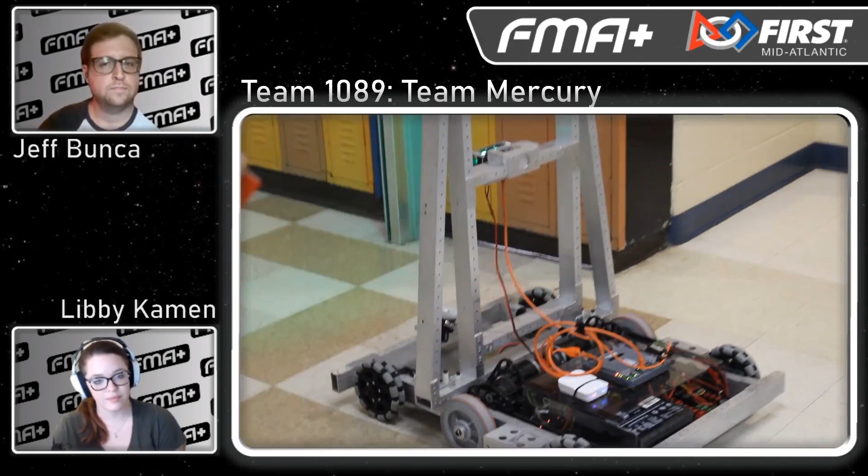One of our goals on the Programming Electronics Committee is to keep it sustainable, keep new members coming in and building up their skill sets. Over the past 3 to 4 years we've been building upon our code base and optimizing existing code so it's robust and strong. We have a command-based system using WPI library, which makes it easier to break into project groups and delegate roles to project managers, who then have their own groups. The project managers work with students one-on-one or in small groups to complete tasks and learn more, whether it's vision processing, color processing, which we saw more with the control panel this year, motion profiling, autons, and things like that. With electronics, we teach them how to wire the robot in an organized fashion, how to solder and crimp, and all the physical hardware components needed on the robot. All of these processes make it much easier to train new members and get them integrated into our committee and working.

It's one thing to have a strong programming presence and a strong programming team, but you guys have actually designed a process and a system to maintain that level of programming efficiency for years to come. That's super smart and really commendable.

But Nihar, we've talked about the programming, we've talked about how your team is set up and what you guys do to prepare. But now I want to know what you guys have made. So Nihar, why don't you run us through the robot?

Yeah, absolutely. So this year we named our robot Knock on Wood. We used a West Coast drive, 8 wheels, so 6-inch Colsons all around with a double drop center. We used WCP single speed gearboxes with 4 Falcon 500s, 2 on each side, which gives us a rough speed around 15 feet per second.

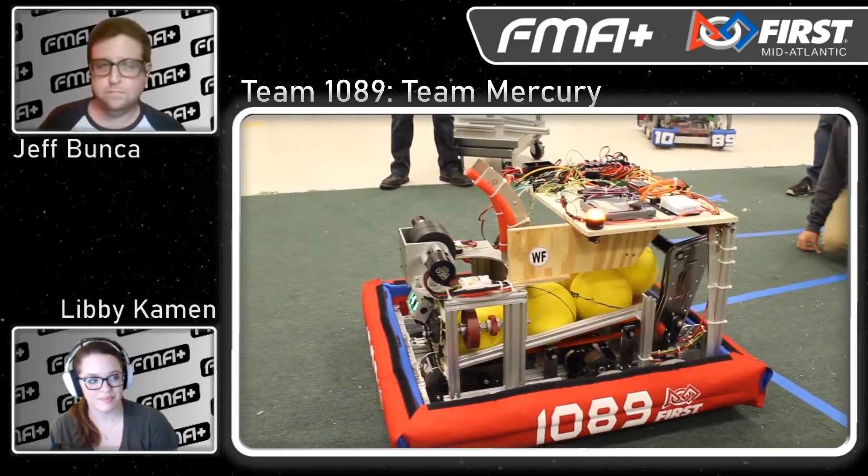At the start of the season, we defined 4 design priorities. The most important was to have a touch-and-own floor pickup. So as soon as we touch one of the game elements, we wanted to make sure we'd grasp it efficiently and quickly. We knew Infinite Recharge was going to be a cycle game, so we needed fast, protected cycles through the trench run.

So to do that, we decided to build underneath the control panel, which would allow us to move more efficiently across the field. We also wanted to climb to get those good points at the end of the match, as well as those ranking points. And although it was less of a priority for us, a control panel mechanism was something we wanted to build.

Okay, so you guys have these great design priorities, and it seems to be a vital part of the design process, right? You need to know what your robot's going to do and why it's going to do it. So Jack, how did you get from your design priorities to your robot? Can you walk us through the decision-making process?

Yeah, absolutely. So once we have this list of parameters for building a robot, we start doing some basic research and design work for the actual machine. The first thing obviously is getting at the drivetrain. We knew that navigating through the trench underneath the control panel quickly and easily was critical to our design.

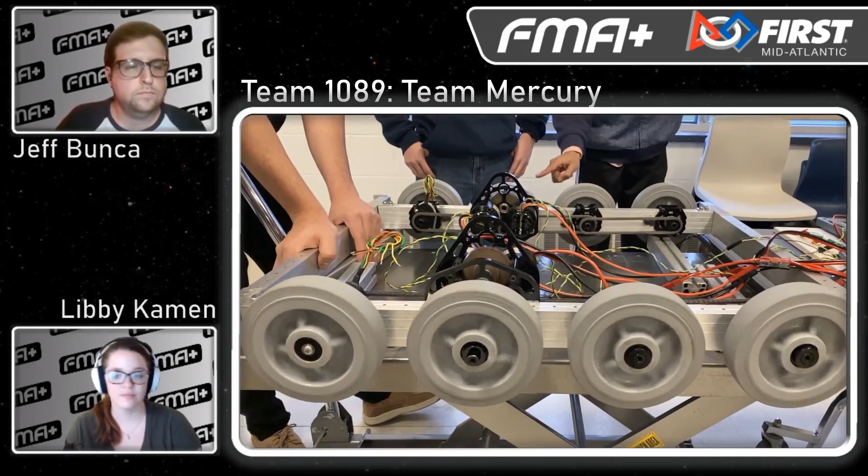So we liked to go for a longer drivetrain over a wide one for that reason, and we also wanted to reduce the turning scrub when aligning to shoot. An 8-wheel drive was effective because you'd only actually be on 4 wheels on a double drop center when aligning, and that would also make it easier to go through the rendezvous point. So that was definitely an advantage.

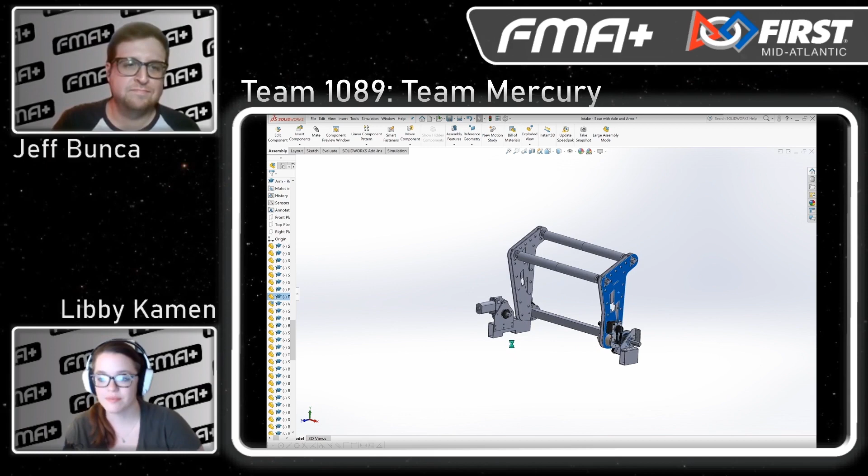Another mechanism we focused a lot on was what we like to call our sexy intake, which is a shout out to my boy Tyler Lucas for basically single-handedly designing it, so a lot of credit to him for that. We call it that because of the lightning bolts we actually had CNC'd into it, and access to a CNC this year was a brand new thing for us. It was actually our first fully fabricated subsystem, powered by a snowblower motor that had a clutch on it, so on the field, when bringing it on and off, we could manually raise and lower it.

We didn't even need to iterate the design. So once we put it out and we were able to fabricate it, we didn't actually need to iterate it at all. It kind of just worked. It's super robust. It just never failed. We're really proud of that.

For our shooter, we prototyped a couple different designs, two of which being a dual wheel prototype with two side-by-side wheels where the power cell would go in between them, and another that was a single wheel with a hood. We elected to go with the single wheel with the hood because we found it to be more accurate in our prototype.

Our dual wheel prototype actually became our feeder. We turned it 90 degrees and had the ball go into the dual wheel and shoot the ball up into the hood. That actually worked out really well, and it was modified to be our final design.

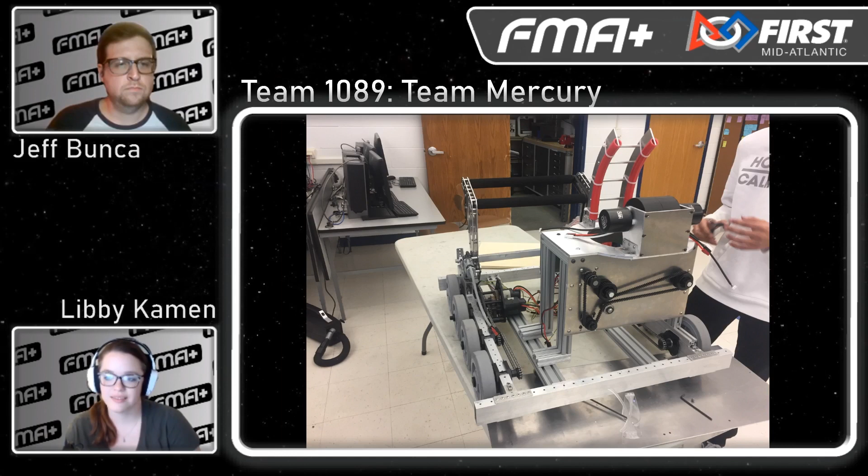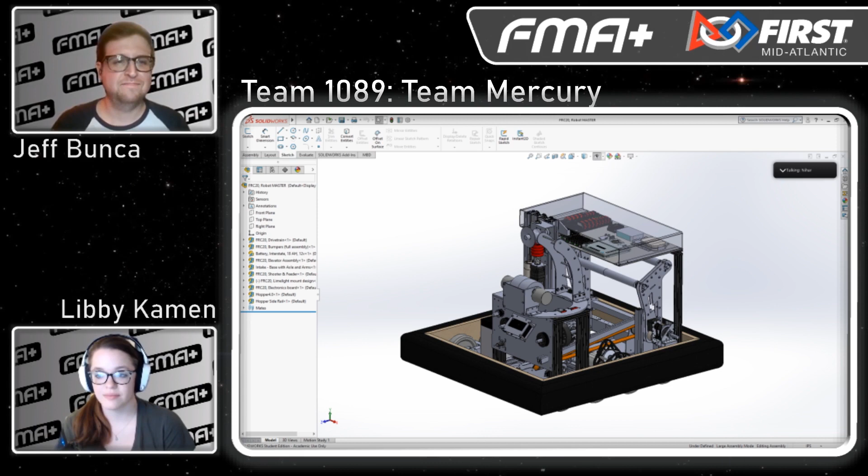Finally, our electronics board, which we treated, unlike previous years, as its own subsystem this year. In past years, we had just slapped electronics and wires in at the end, like a lot of teams do, and it doesn't really go that well. So this year we treated it as its own thing. We designated space really early for camera mounts, wire placement, stuff like that, and that made competitions a lot easier. Everything was accessible, so we were really proud of our design this year.

We were proud of the decisions that we made. We had a lot of new students being integrated into the CAD and the decision making, and although it was kind of slow to complete, part of the reason why we weren't able to have a climber was because of that.

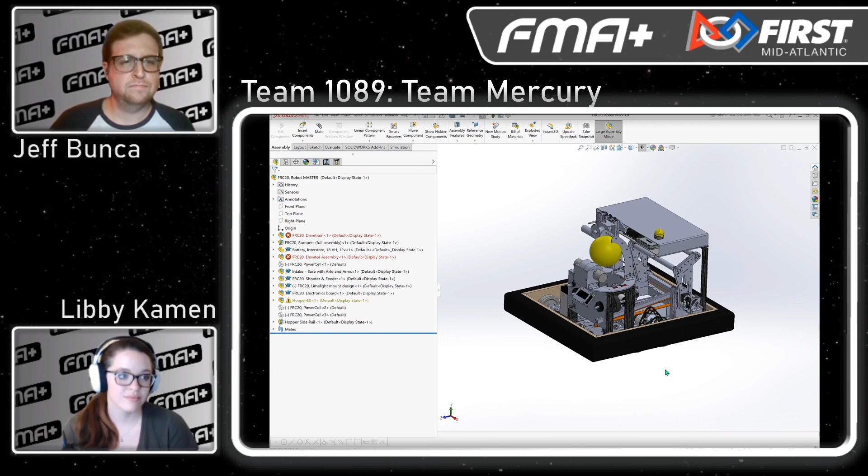Come time for competition, we were proud to say that we owned a lot of the design - it was very student-driven, so we were proud of that. We were also proud that the process we used to get there was very structured, and we could definitely see a way to build off of that in future years.

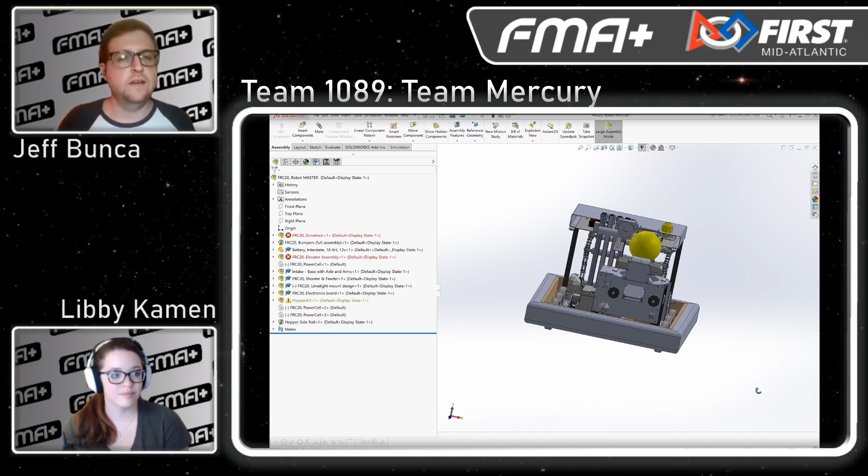Yeah, Jack, let me ask you - you said that one thing you noticed was that while you're super proud of what you produced and how you got there, you were a little bit slow to reach completion, which obviously impacted your climber execution. Do you have any ideas on how you might improve to avoid or reduce that impact in the future?

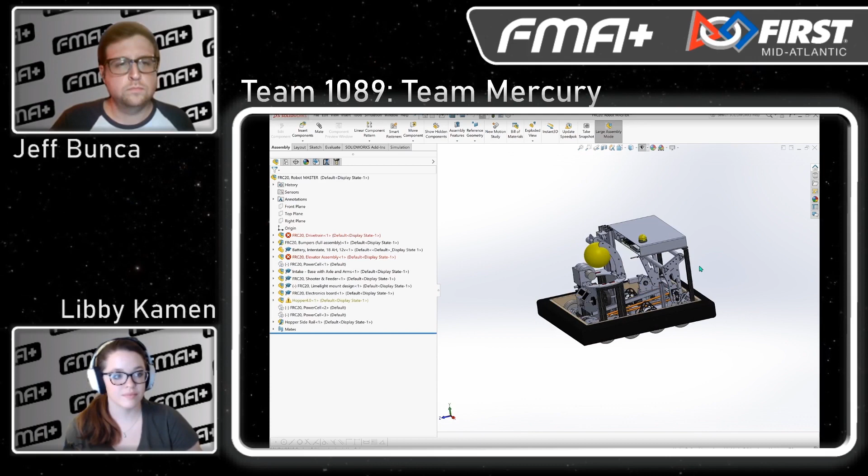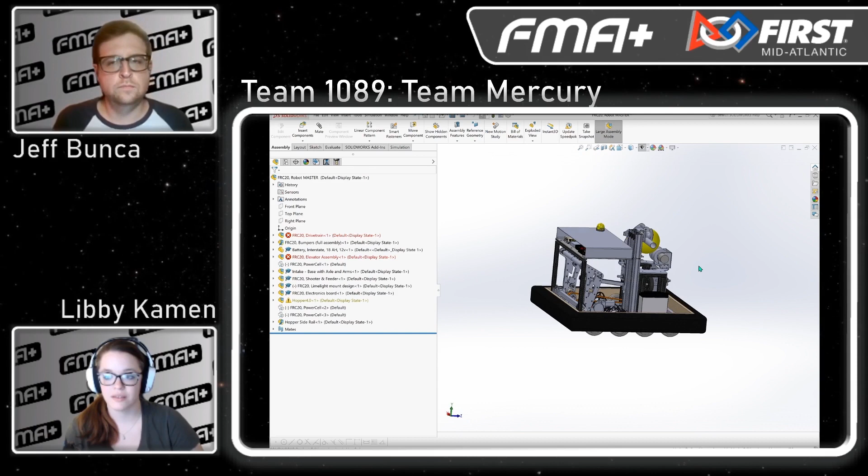Well, I think a big thing we've always struggled with as a team is communication between other technical committees. This year it probably went slow because switching to SolidWorks was a big thing for me, along with switching to GrabCAD, having to upload and download your changes every single night, and having to keep in touch with the library. That was definitely a big change, so I think that slowed down the process. But to speed it up, getting familiar with that while also communicating with my peers and other committees, and talking with programming and build more, is definitely something that'll help.

Our shooter is super reliable, and part of the reason for this is because we're using a closed loop system, which uses the limelight to get the distance and angle the robot is from the target. We turn this distance into an RPM value for the shooter, using a 6-degree polynomial. We actually had to use linear algebra to turn the 7 data points into the polynomial. We also use the limelight for auto-aligning to the target, which again is a PID loop.

One reason we're able to score all of our balls into the goal is because we don't allow the feeder and hopper to put the balls into the shooter until we're at the correct RPM and auto-aligned to the target. This is one of the reasons why our autons were accurate and reliable, even if all we did was drive off the line and shoot.

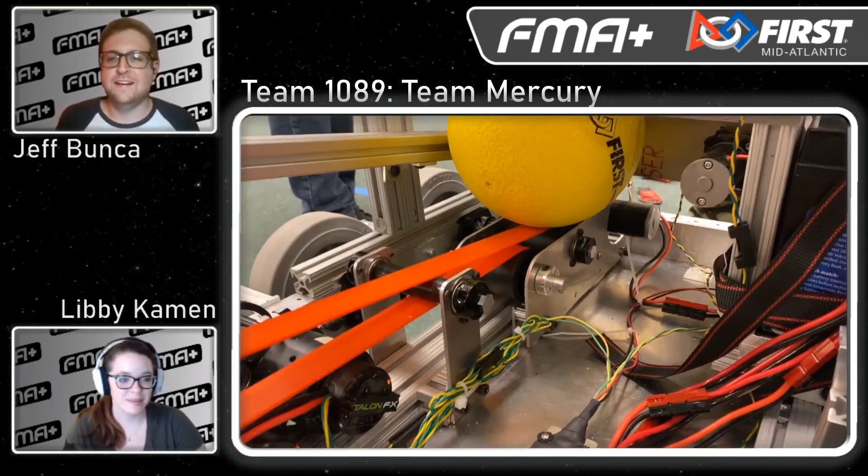So Nihar, I heard you guys refer to your robot as 'knock on wood' earlier in this conversation, and I know 9 times out of 10 when there's an interesting robot name like that, there's an interesting story behind it. So where did knock on wood come from? Yeah, so first off, as you can see from our robot, there's a lot of wood on it.

From the base of our electronics board to our hopper floor and some other structural parts, it's got a decent amount of wood. But I think the most important bit was in the shooter. Initially we had a 2-rail shooter design, and it wasn't as consistent even after we went through several iterations of it. We just couldn't get all the balls to go in. We were having issues with distance or height, stuff like that.

So what our head mentor, Mr. Gregory, suggested was that we redesign it to make it completely flat so that the compression of the ball is consistent throughout. Two days before our first competition, Hatboro-Horsham, we were still getting inconsistencies with the ball. But we have this mentor, he's a master carpenter, his name's Mr. Cardoso, and he created a wooden insert that fit almost perfectly between those two rails, and it basically made the entire shooter hood flat. And as soon as he added that in, the shooter was completely accurate.

It started shooting outer ports like it was nothing. We were crazy accurate, and it was one of those moments where we all breathed a sigh of relief, because we were like, oh my god, we have a competitive robot that somewhat works. We basically named it the wooden insert that saved the season, which is essentially what it was. And then there, knock on wood, was named.

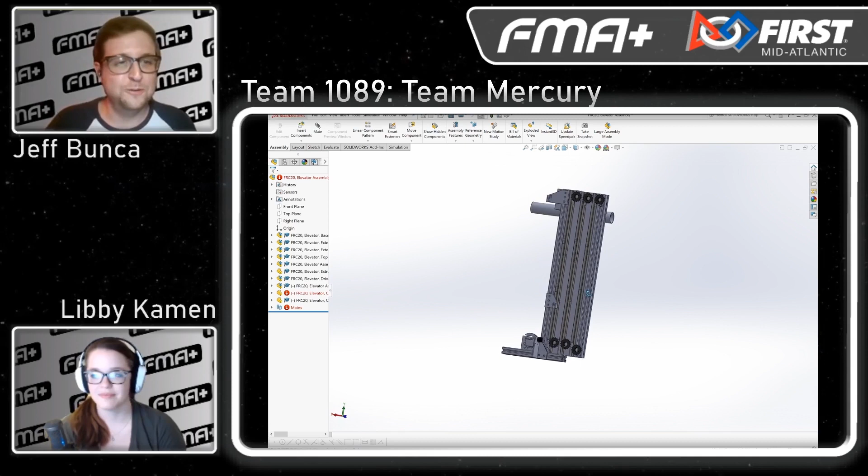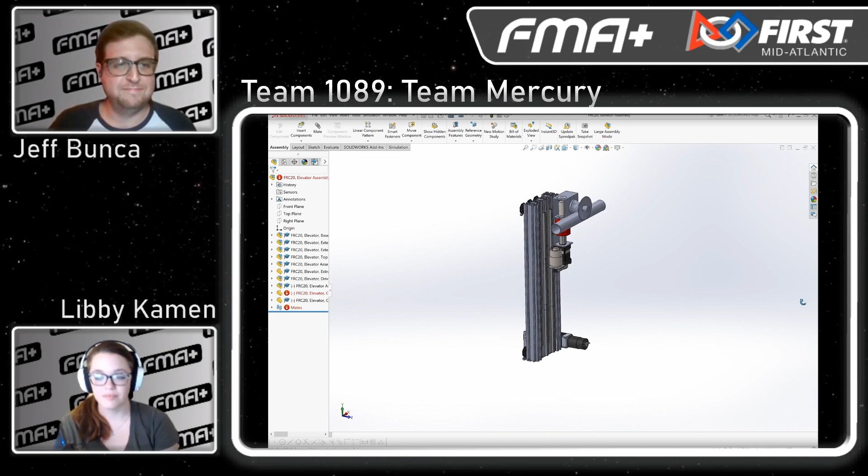So for the next competition that we were anticipating, we had our climber ready and it was built and completely good to go. It also had a skywalker mechanism, which is a self-leveling system we referred to as the skywalker, which really was an ingenious design because it was integrated with our control panel mechanism. It uses one motor but runs the control panel mechanism and the skywalker mechanism at different gear ratios using a worm gear. So that was pretty cool.

Another thing was, even though we went through a couple of iterations at the competition with the hopper jam, we were still having some of it and we could always make it better. So we added a motor attached to a compliant wheel that ran counterclockwise to dislodge the balls and try and get a better flow.

And from the software side of things, we also added a better spin-up feature for faster initial shooting. One of the problems we were having at the competition was that it was taking way too long from stop driving to finish shooting all 5 power cells.

So pretty much that was just PID tuning, making the robot align faster, and working out some things with the Limelight. Of course, one of the most crucial features to any game is Auton. At Hatboro, all we had was a 3-ball Auton that would drive off the line. In our next competition, hopefully, we'll have a 5-ball Auton ready to go that we've already tested. We're also going to have one, hopefully, that steals 2 balls from the opponent's trench. That one we are still working on.

It was a successful season for us in spite of being cut short by unprecedented events. But here on the team, we have a motto: the team is what you make of it. We saw that motto really embraced by all our students this year. We were really successful at getting the best out of everyone. Our leaders and upperclassmen did an excellent job teaching new members skills, and those new members rose to the challenge and the occasion to use them. We were really impressed with our freshmen who took everything we as leaders taught them and used those skills when necessary. Overall, it was just a very positive experience for everyone on the team.

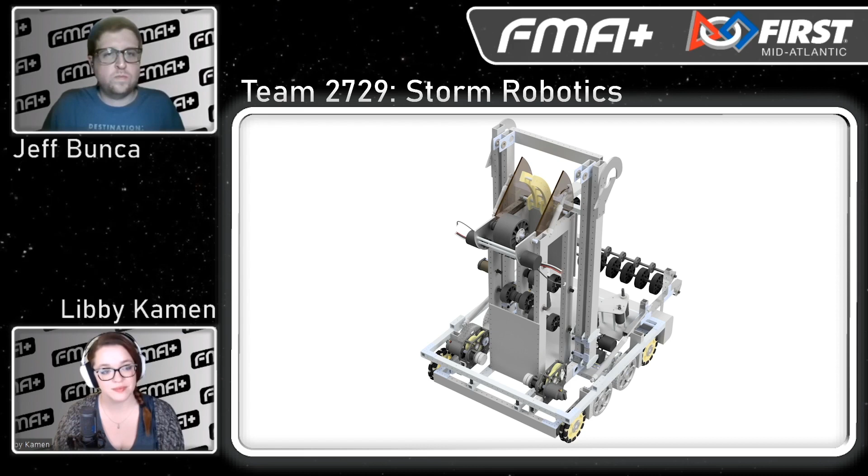So Dan, why don't you start us off, introduce us to your team, and what your season started off like this year? Sure, so we're Storm Robotics. We've been around for 12 seasons now. During this year, we had the chance to compete in competition, as well as undergo a couple of big changes. This year, our team expanded to add around 20 members, and so a lot of what we've been focusing on is trying to set up an infrastructure for all of those newer members who have less experience. That includes training in many different fields, whether it's GrabCAD for design, CNC machine training, or safety training across all departments.

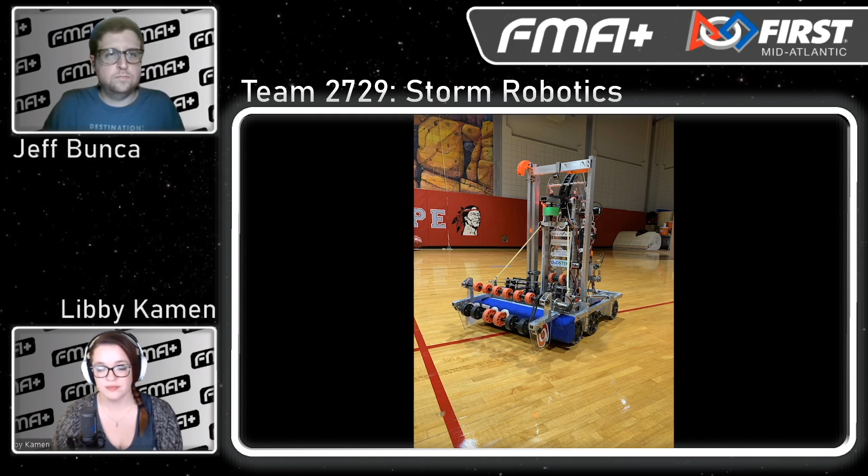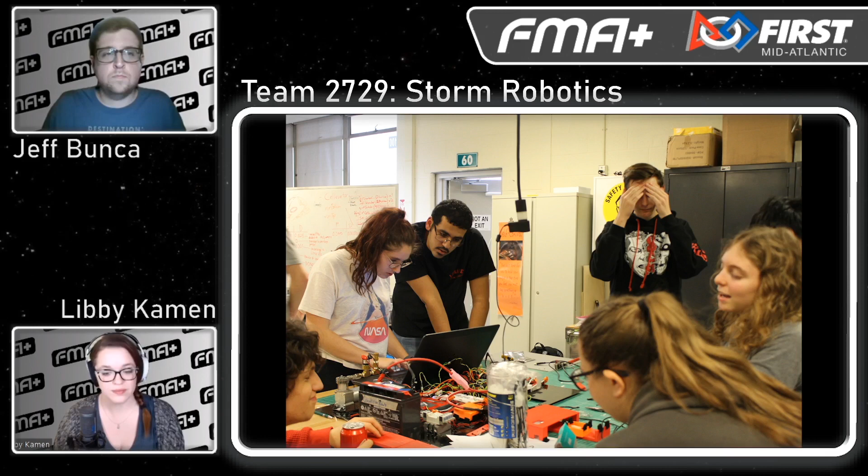Nice. Pranav, maybe you could dive in a little deeper in regards to your electrical and software training. How do you guys handle those two areas? Well, with electrical, we want to get the basic training, such as crimping, how to wire an FRC robot, and how to work on pneumatics. With software, we wanted to teach the software team command-based programming, how to use GitHub, and how to program our scouting app that we have here on Storm.

That's really cool. It seems like with 20 new team members, there's a lot that you can do to increase productivity, or you could totally throw off your workflow. So Dan, let's dive into a little bit of what that team workflow is like.

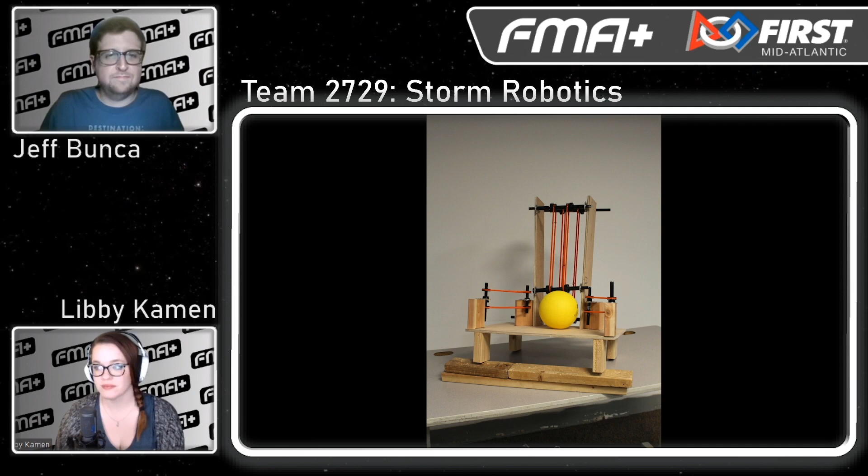Yep, so we wanted to emphasize having a controlled structure of how we progress through the build season. Our build season begins with an initial discussion of how we want to play the game, whether it's strategy discussion in large groups that allow all of our members, whether experienced or not, to talk. Then we move into two prototyping stages, which we call Whoosh 1 and Whoosh 2, aptly named because we go through them in a little less than a week each. Throughout each one, we're doing rough prototyping and gradually refining our designs.

Part of the advantage of having new team members is being able to have more different separate groups. So we were able to handle a lot of different challenges this year, and we kind of created a bot that can do everything in the game.

After that, it goes to integration, and a lot of that is about communication between our different departments, which is something we struggled with a little bit last year and that we've been trying to refine this year through things like communication over Trello, keeping track of objectives.

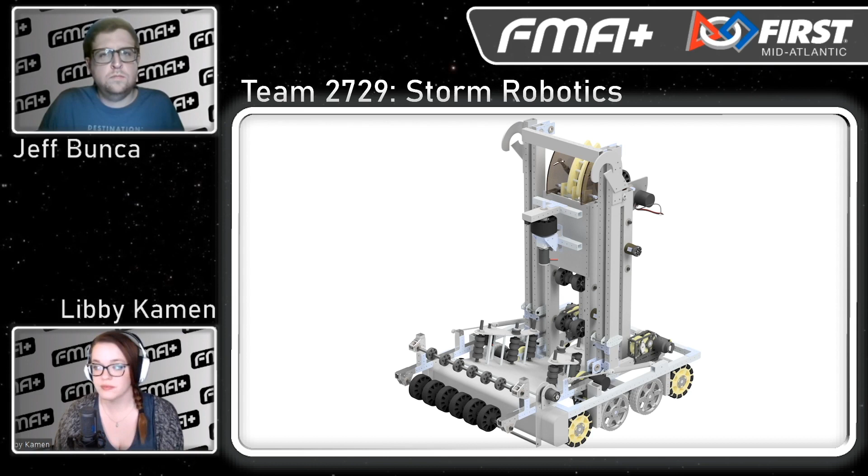A lot of what we did started in the preseason. We started training with our new members in the preseason with CAD and GrabCAD, so they would be more suited to be able to contribute to the team.

We've also been working to include every component in our CAD, whether it's electrical components like the RoboRio or the Limelight, so we're not just figuring those things out after we already have components set in place.

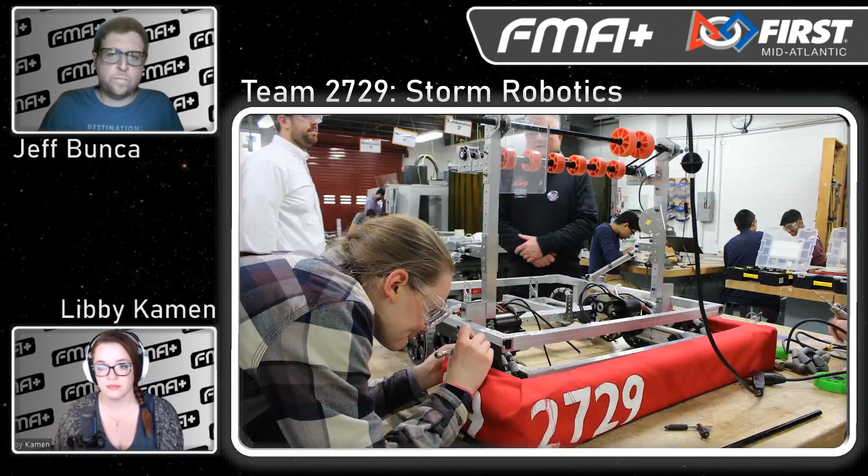What kind of workflow do you guys have when it comes to the electronics? So in electrical, we also start with a brainstorm. After we figure out what kind of bot we want and what we want to do with it, we need to think about what components will best fit the functions that we need. So how do we want to actuate stuff?

Do we want to use pistons? What kind of motors do we want to use? And for pneumatics, like what's the PSI that we want? So we have to make all these decisions.

And then after that, we start on the actual building. This year we have a belly pan at the bottom of the robot where all our electrical components are, so we started with building that. We also built the gearbox, and then we started to wire up the robot.

And then after that, we start testing. So we test our sensors. We test all the basic things just to make sure that the robot will be fine for software testing. And once we're done with testing, we move on to preparing for competition.

So we know how you've got it all set up for electrical. What about for software? So software, we also start with a brainstorm, and we organize the functionality into subsystem commands and command groups because we use the command-based framework. We basically figure out, okay, so we need the robot to move forward.

So, okay, we need a drivetrain subsystem, and what commands do we need? We would need a drive manually command, a drive automatically command, and so on with all subsystems.

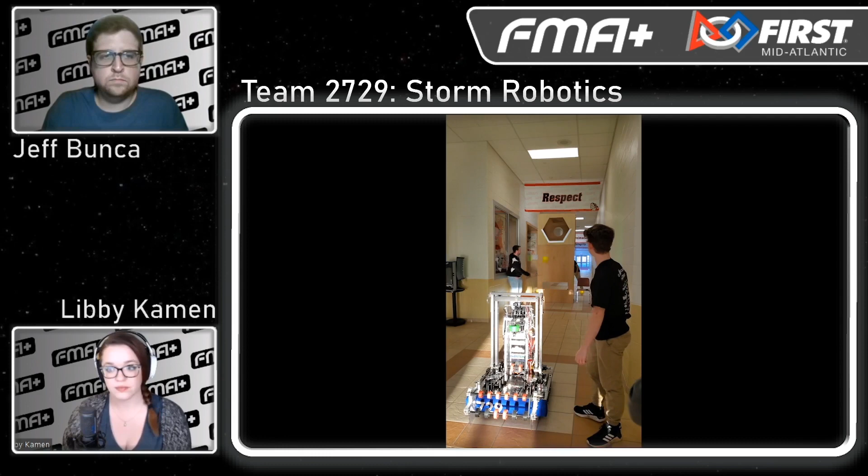Our robot is a tall bot, pretty much at the height limit, where we're able to store 5 power cells at a time, and we're able to shoot from all distances, whether it's butted up against the target or behind the control panel on the other side—long and short shots. We can do that with our shooter, which has an actuating hood. In order to get the balls, we have an intake that folds down and covers the whole width of our bot, allowing us to pick up multiple power cells at a time.

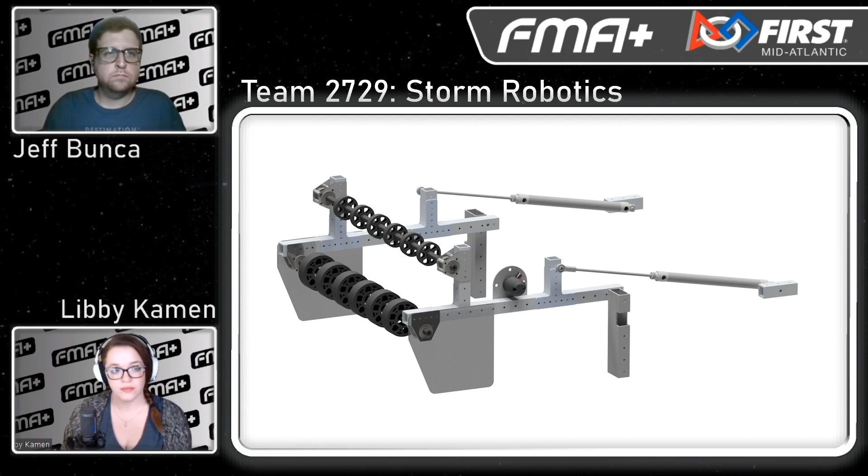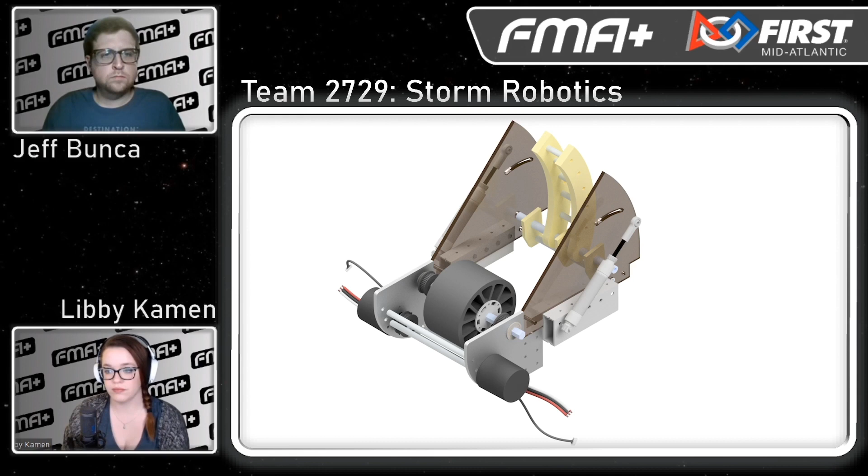We have a hopper, which has belts that spin in opposite directions to get the power cells into a single file line so we can store them inside our robot. We use a little bit of software to help with this. For the intake and hopper, it's actually just motors, run through teleop control—when the driver clicks a button, the motors will run the intake and hopper.

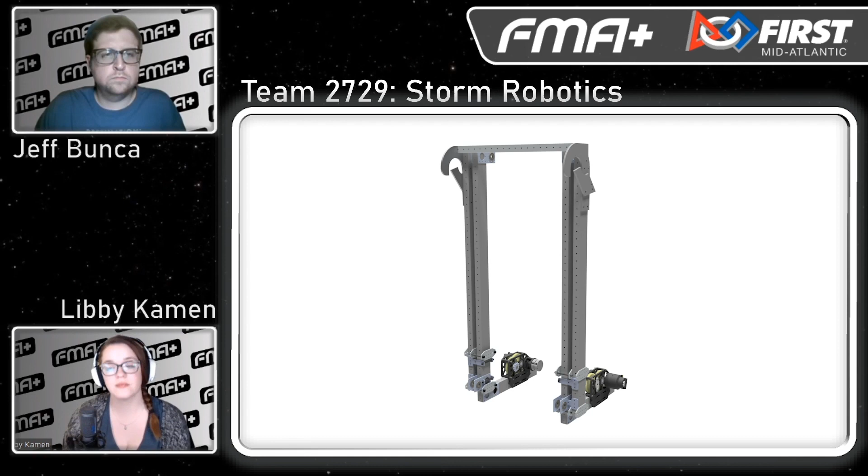Our robot is also able to hang. We were able to do this in our first competition, and it really helped a lot. We hang using a gearbox with a friction brake on it, so we can stay up even if there's no power. We also have a mechanism for manipulating the control panel, which we didn't get to use in competition, but we did testing for it and we're able to do that too.

For the control panel, we have a color sensor, which was given to us in the kit of parts, and it basically returns the color that it's currently seeing.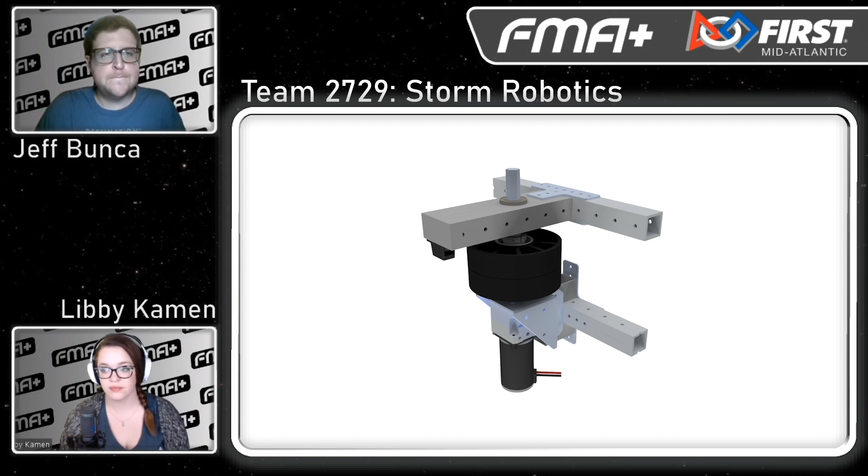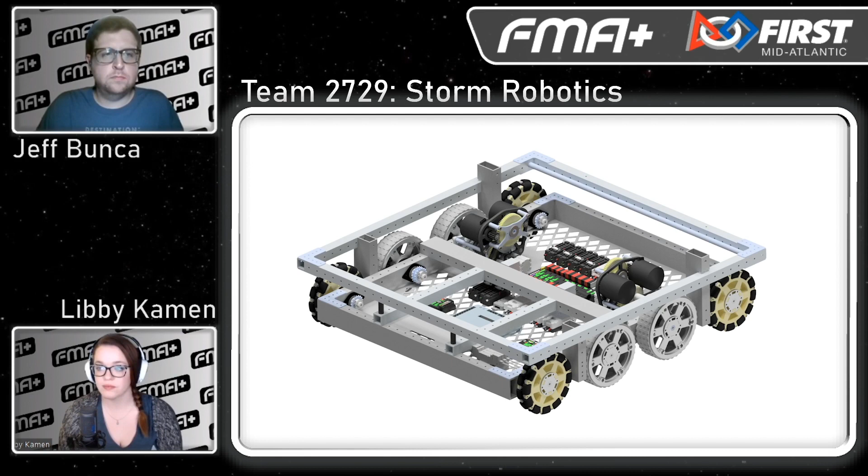One of the other things we wanted for competition was a bot that was both maneuverable and able to hold its own. So we have a 2-speed gearbox. We're running the chassis with 4 traction tires and 4 omni wheels, giving us a good turn radius. The 2-speed gearbox allows us to have high torque in one gear and high speed in the other. We're able to push other robots and hold our ground, avoiding zones where we could incur penalties, as well as have speed to cross the field when we need to make cycles.

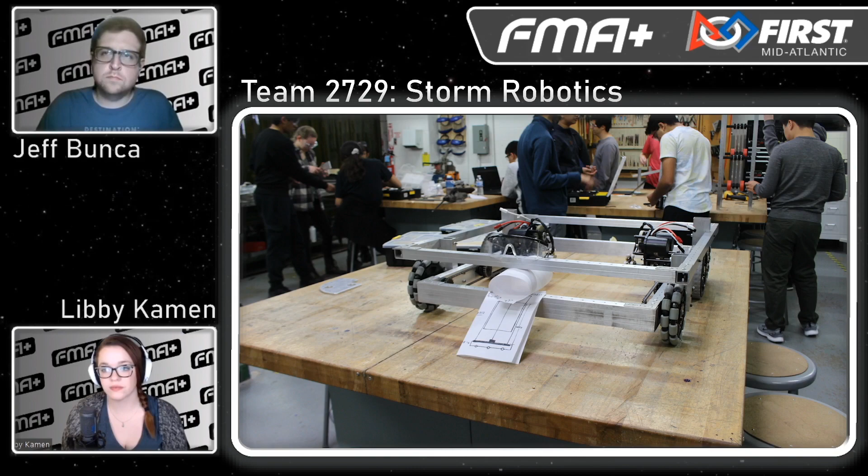Pranav, can you run us through the autonomous modes? We have 2 major autonomous modes right now: launch and then drive, and drive and then launch. It's a command group, which is a group of commands. For drive and then launch, it drives back, aligns itself using vision, and then launches a power cell or 3 power cells into port 2 or port 3.

And we also have launch and then drive, where the drive team aligns it, so we don't need to use vision align. We just launch the 3 power cells and then reverse 3 feet.

Awesome, dive into the robot. So obviously you guys did get to compete this season, so let's hear a little bit about that. Not a lot of us have had the chance to compete in Infinite Recharge.

I'd love to hear your reflections on the game and strategy. I've been a driver or on the drive team for the past 3 years, so each year is a bit of a new experience. Last year there was a lot of emphasis on being able to handle yourself in cycles, whereas this year our team focused fully on offense, where last year we were more of a flex spot in what we could do. So that was a little bit different for us.

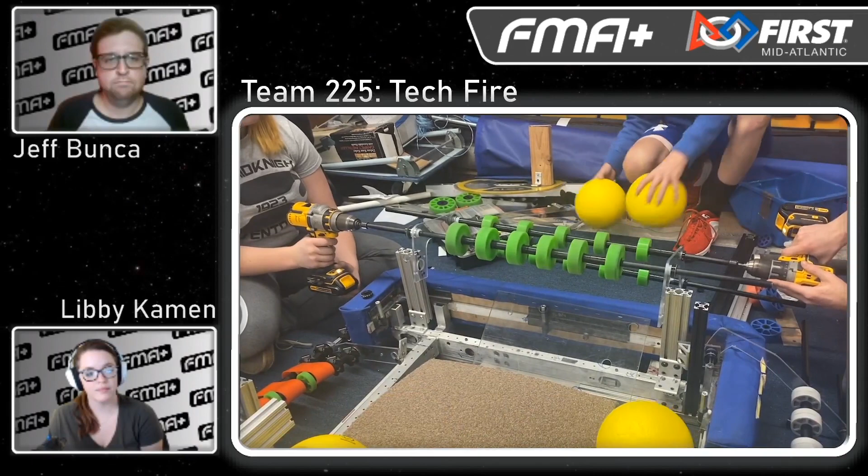We also were prototyping climber hooks at the same time. Something else we start almost right away is the drivetrain build, which takes about 4 students. Then we have another student working on the CAD, packaging everything together and making the first iteration of drawings for things like the shooter and the serializer. As we finish up prototypes and reach dead ends, we pull off students to begin working on those other systems. This is just an example of one of our intake prototypes.

And that is our robot for 2020. It is currently unnamed, but we'll get to that - we still got to think about it.

So first we're going to start off with the drivetrain. We decided to go pretty square this year, 28 wide, 32 long, so that we could have a very wide intake for acquisition. It is constructed with welded VersaFrame. We decided to go with an 8-wheel drive so we have a firm, steady base for shooting instead of rocking on 3 wheels. Since we have no pneumatics on the robot this year, we have a single-speed transmission with an 8-to-1 reduction at 13 feet per second. We also decided to go with 3 NEOs per side and a full bumper wrap.

So Nick, can I ask, did you guys ever consider the Falcon 500 motors that came out, or did you guys decide to go with a tried and true motor you were used to, and that's what led you to the NEOs? Tried and true in that we haven't really messed around with them over summer - we don't really know what they did, so we just want to stick with what we know and make sure, in case for whatever reason something happened with them.

Makes sense. Here's a quick test of them running up.

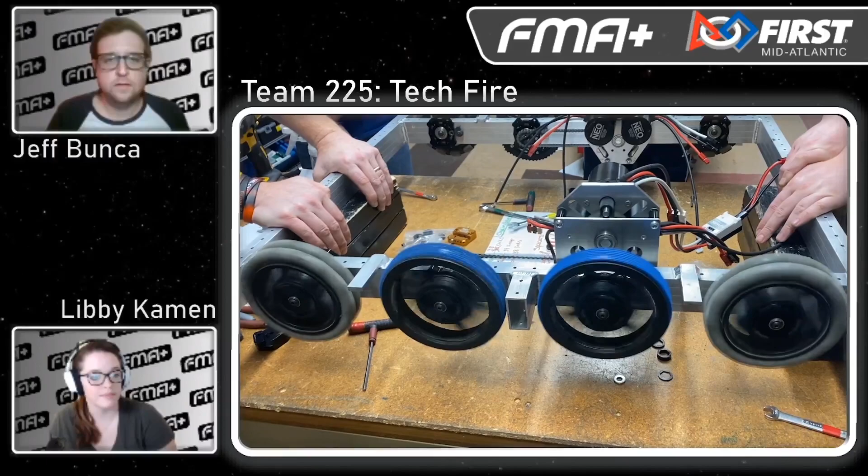Have you guys heard about the concerns of using the Omni wheels on the leading edges in regards to the barriers in the rendezvous zone? I heard that some Omni wheels were not handling the damage or the shock load from running into those barriers as well. Have you guys considered a contingency plan for that?

Oh, we definitely have. I mean, if something works out, we'll figure something out easily. And also, if they break, we replace them - at the end of the day, if we have plenty of parts and a pit team ready to go whenever. Cool.

For our intake, we originally had an all polycarb frame, but we quickly realized we needed the extra rigidity of aluminum in the back, so we added that on. The rotation is motorized via Neo 550s, and the intake can either be moved all the way up inside the robot, or moved down so the wheels are almost touching the floor.

That way we can directly load power cells into the robot via the human player stations. All of the rollers have vectored intake wheels on the edges to move power cells toward the center and prevent jamming in the polycarb. The first two rollers have compliant wheels in the middle, and the one in the back has omni wheels in the center. That rotation is also powered by Neo 550s through the Versa planetaries.

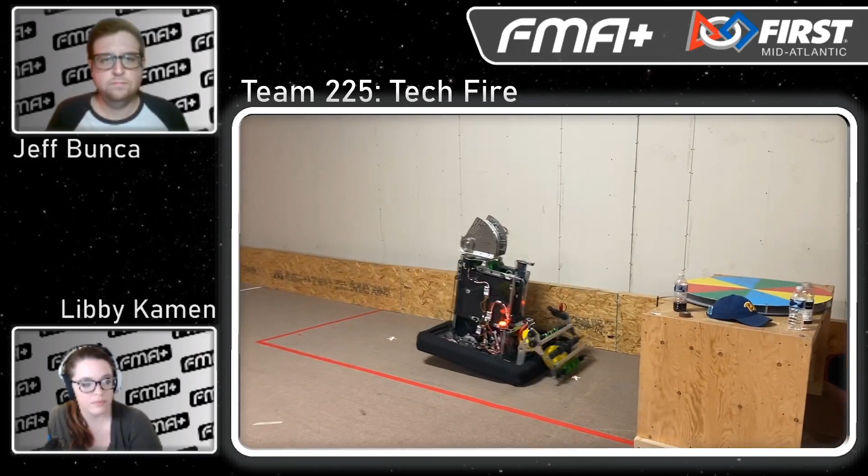Moving our way back, we have the serializer and indexer. At the front of the robot, we have two star wheels that flop the balls in and help serialize them into one straight line, attached to the color wheel on a direct shaft all the way up, so we didn't have to worry about a different motor for driving it. The indexer is constructed in an S shape, with the majority being 2-inch wide belts, and everything is compressed inside so it maintains a solid position.

This year we also decided to have 6 spots open for balls so that jamming is reduced. For control, we have a time-of-flight sensor in the front, right where the star wheels are, which tracks the number of balls entering the serializer, shown on the driver's station. It resets whenever we shoot, and it also makes the spacing between balls perfect so they don't touch each other and jam.

For the color wheel, we just use the Kit of Parts color sensor, and we use encoder ticks for the rotation aspect of that.

So for the shooter, we went with a turret design this year with a Neo 550 on a 60-1 ratio going into our water jetted turret gear. On the shooter, we also used our CNC to design and create the shooter.

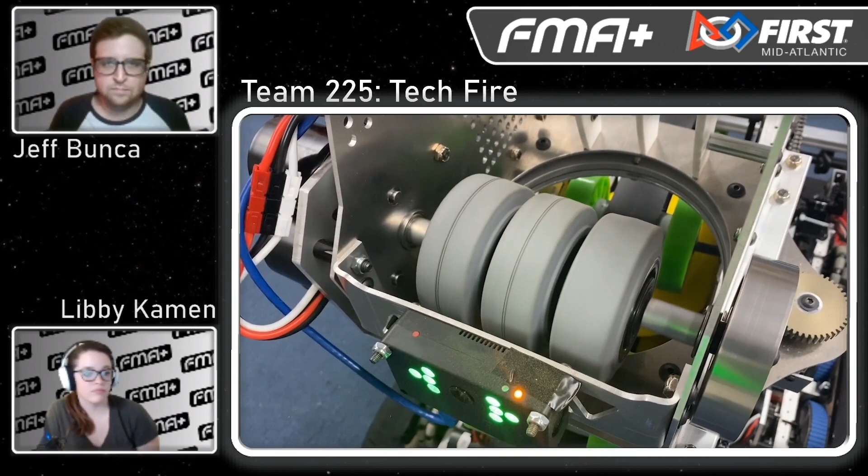Yeah, you guys definitely have enough power there. That's for sure. That's awesome.

So for tracking the goal as well as auto aligning, we use the Limelight camera, and that will not only line up the turret automatically, it will also send the right RPM to run the wheels at to make it from whatever distance we are away.

So last we have the climber. This year we went with a 2-arm climber that was spring loaded to extend up to heights, and underneath the indexer you'll find 2 winch wheels driven off of a single Neo. That's released, then the spring springs out, grabs on, and the winch pulls us back down.

We're still developing that a little bit. We were going to get it done, but then things happen. We decided to focus less on the climber and more on the shooter, because that's where the ranking point is, and we also found more value in shooting.

So for this one, we decided to stay on the left side of the field just in case our alliance partners could not move out of the way, so we could somehow get over to the other side of the field if something happened.

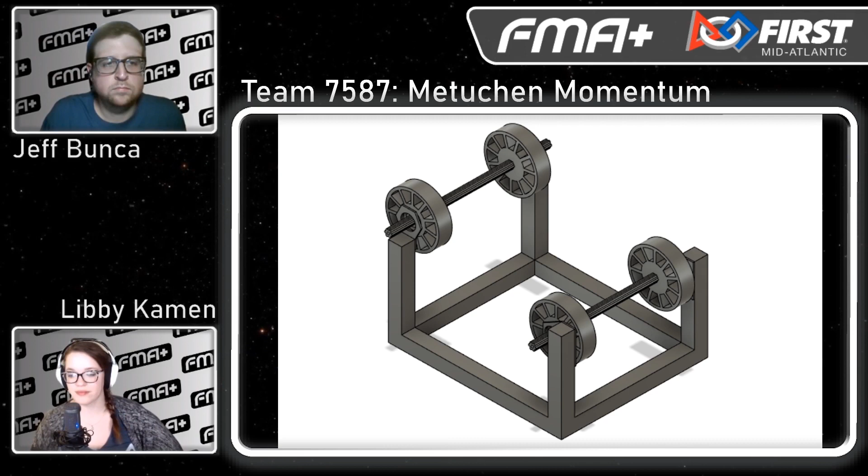This year, we also realized that we were lacking quite a few things last year. So in order to make up for that, this year we created some new teams on our robotics team. We got CAD, a strategy team, and a safety team, all of which we had no idea were really important, and we didn't know that last year. So we decided to fix that by creating these teams this year.

So you guys actually elaborated further on your 2019 season robot and used it as a tool to prepare your current and new team members for the new season? Yes, that's a great idea. That's a really, really resourceful way to use what you got and become better from it. So props for that. All right.

So we've heard about how you presented or how you've prepared for the 2019 season. And you guys have a lot of measurable improvements, a lot of great additions, and really exciting upgrades. So now let's talk about 2020. Paige, maybe you can walk us through the 2020 season and its process for you guys. Yeah, of course.

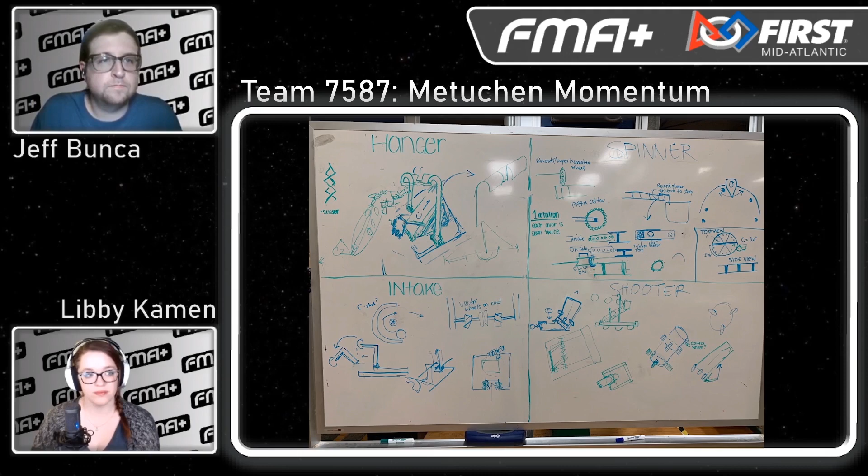So we began our season directly after kickoff, the day after actually, with a brainstorm session, and we worked through different design ideas and what we wanted to make our robot do this year. Eventually we ended up basing our idea off of Team 118's EveryBot design and elevating it to our own purpose.

In the sense of electrical, we used a vertical and horizontal hybrid board because we did not have enough space in our robot to make a full board. So we wanted to take advantage of every space that we had and make a fully functioning system that was completely effective while also saving us as much space as possible.

We also invested in some new connectors. We started our season off with Anderson connectors, but then decided that we wanted to switch to Wago. So we overhauled the entire system, which was difficult while we were in the process, but I think it really benefited our robot in the end.

On the programming side of things, this year we actually used sensors for the first time because we wanted to be able to spin that color wheel. So we used the REV sensor that was included in the kit of parts and figured out how that worked. It was pretty exciting when we first got it to work correctly.

And of course, we also updated all of our code because last year's code was a bit of a mess. This year, we updated everything and overhauled everything to fit the FIRST standards. So now we know where everything is, we know how everything works. It's super neat now. I love it.

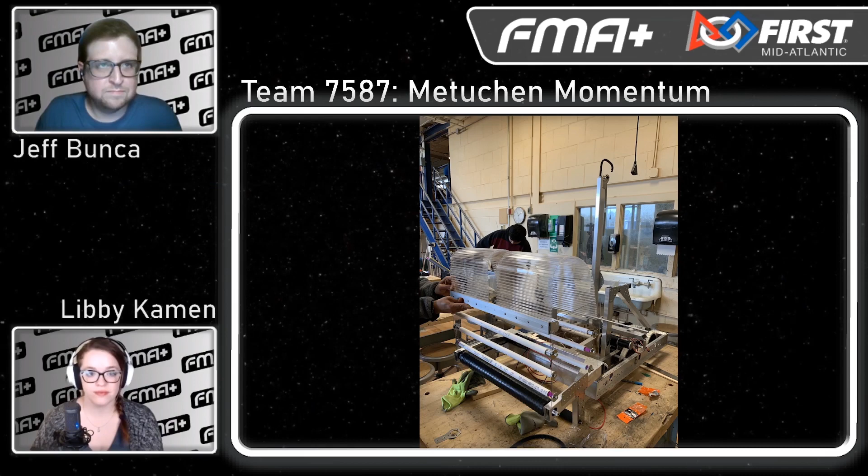On the mechanical aspect, as Paige already mentioned, our design was heavily influenced by Team 118, the Everybots, and we thank them for putting their resources on the internet and allowing teams to reference it to create a robot. So our mechanical team was split into the chassis team, where we used a long chassis and added the arm, which instead of using the bag motor used in the Everybot design, we switched over to a Neo because A, it looked really nice, and B, it was way stronger.

We learned about the Neo and how to really mount it with the Spark Max, and it was a new experience for both the electrical team and the mechanical team.

We worked on an intake which was very similar to the Everybot design, but we added a way of indexing and only being able to hold 5 balls, because the current Everybot design has space to hold more than 5, around 7-ish balls. So we improved that design by adding a panel to be able to index and only hold 5 balls at max.

Then we worked on the hanger. The hanger was heavily influenced by the Everybot design, like most of our other parts. We actually tested it out and it worked successfully, which was really interesting for us because a lot of people on the team can't even lift themselves up. But we saw the robot lift itself up, which hopefully gives them motivation to do pull-ups.

On the marketing aspect, we got 2 new sponsors on board over the course of the season. The first being Google, and the second, we are actually in talks right now with Altice Mobile for a sponsorship with them.

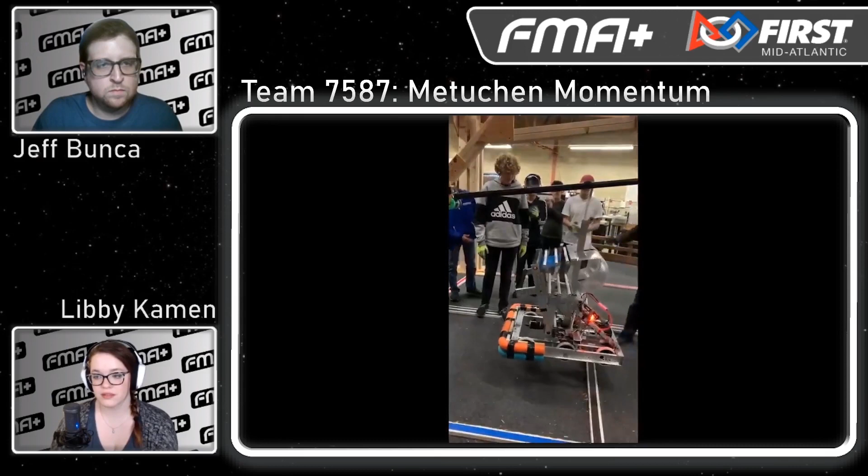We also got some help from other people on Team 303 who worked on our robot with us and helped us discover some new things we didn't really know how to do before, in order to improve and grow our team's functions.

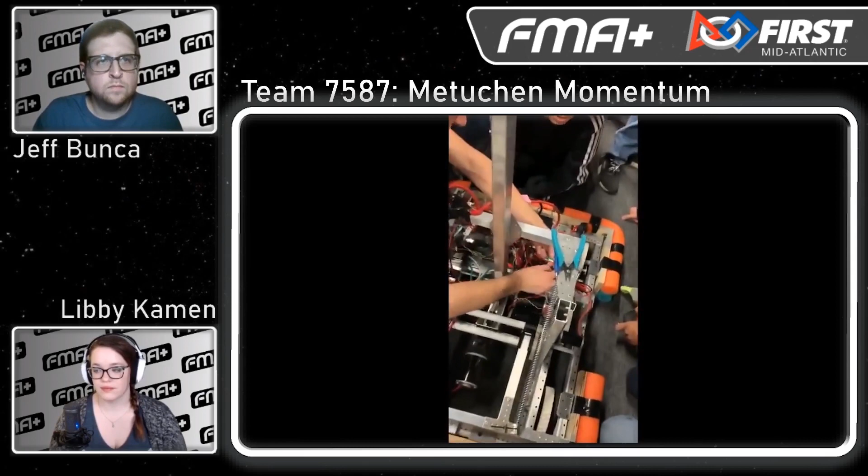Yeah, that's awesome. You guys got an opportunity to practice climbing and practice full field driving. That's something a lot of teams don't get an opportunity to really experience until it counts, right? Until you're in an actual match. Yeah, it was such a great opportunity.

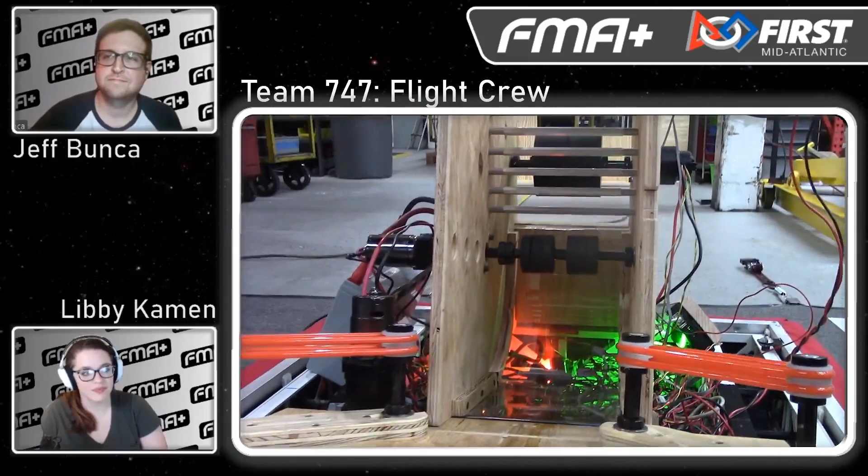So as you start to think about what the robot's going to be, Harshika, tell me a little bit about your prototyping process. We actually went through a lot of prototypes and iterations of many parts of our robot. First, I'd like to say we start all of our prototyping in wood, which I'm sure a lot of teams do. We also have a spreadsheet tracking different balls and their conditions while prototyping, because as we use the balls more and more, they go through wear and tear, and it's important to note their condition.

One of the main parts of the robot we haven't gotten into yet is what we call the aileron — it's how we adjust the angle of our ball, which we'll get into more detail with later. In prototyping, we went through 5 different iterations of this aileron system. We started with a 3D printed curve, then a piece of Lexan, then Lexan with aluminum backing, then another printed piece. Now we're finally on a PLA aluminum hybrid that seems to work really well for us. This came with multiple failures and many tests, and really proved our prototyping design.

We've had many different versions of our indexer, but the main goal was to prevent pinch points. We first did this by having our indexer bands rotate in one direction, then switching them to different directions — one goes in and the other goes out — but then we oscillated them to prevent these pinch points.

One other thing we replaced was the 4 outer wheels on our robot. Initially we started with, on one side of the robot, 2 blue nitrile wheels on the inside and 2 Omni wheels on the outside, so 4 on each side, totaling 8. But then we saw a Chief Delphi thread that someone posted from a week 0 competition where the Omni wheels were destroyed by driving over the center rendezvous point aluminum bars. So we ended up swapping those out for gray traction wheels because we did not want to risk breaking them during competition.

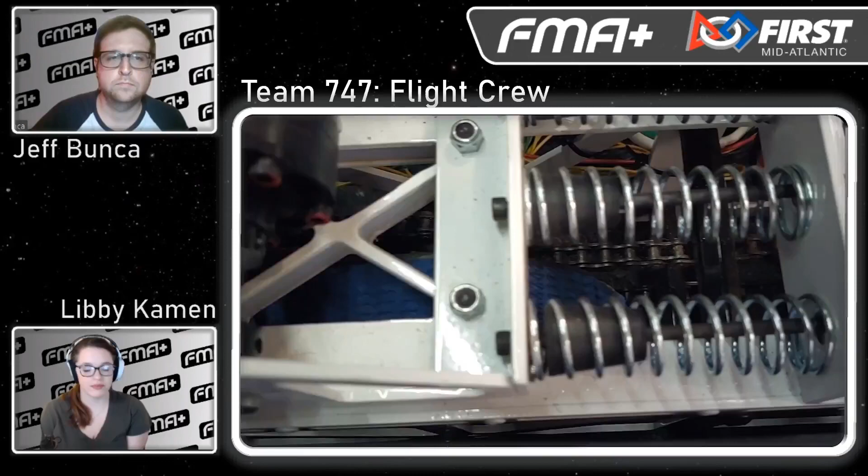Harshika, Sam gave us a top-down, higher level overview of the robot. Perhaps you can go through some of the subsystems more specifically and give us a deeper look into those subsystems themselves. Yeah, definitely. So I'll start off with the drivetrain — we have 8 wheels.

4 are the inner blue nitrile traction wheels, and 4 are the outer gray traction wheels. Like Sam explained before, the inner wheels have more traction, which allows for smoother rotation. These wheels are powered by 4 Falcon motors, 2 on each side, and we also have an auto-shifting mechanism.

With the intake and indexer, we basically have rollers that are compliant wheels, powered by a single 775, and the indexer sorts balls into a single stream. We have 2 bands running in opposite directions, and they alternate these directions every second to jostle the balls.

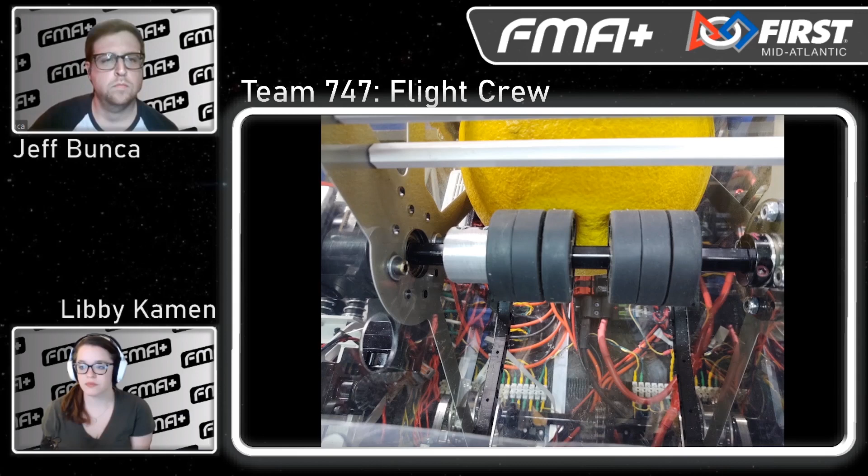For the transfer and shooter, we have the transfer, which is a single wheel shaft with compliant wheels, and it guides the balls into the shooter. We also have a break beam, which is kind of like that sensor you'll see in garage doors, and it's used to preload the balls right before it reaches the shooter.

The shooter itself is a 4-inch flywheel powered directly by a Falcon, and we can control the trajectory of the ball from RPMs and the angle of the aileron. The RPMs basically control speed, and the aileron is our adjustable flap, which is controlled by PID.

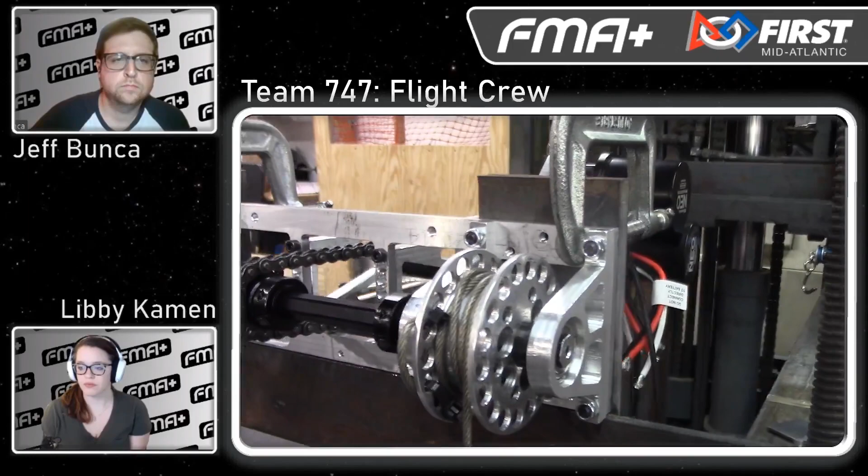Lastly, we have the climb, which is actually heavily inspired by 2056's 2016 climb. It has a winch that is powered by 2 Neos through a WCP gearbox, and it's basically like 6 stages loaded under a spring force. We have a little pin that, when released in the winch gearbox, the climb basically shoots upward.

Then the robot can drive right underneath the bar, and as soon as the robot hits that bar, the winch is driven and it pulls us up, and a pin is put into the gearbox. This basically locks us in place.

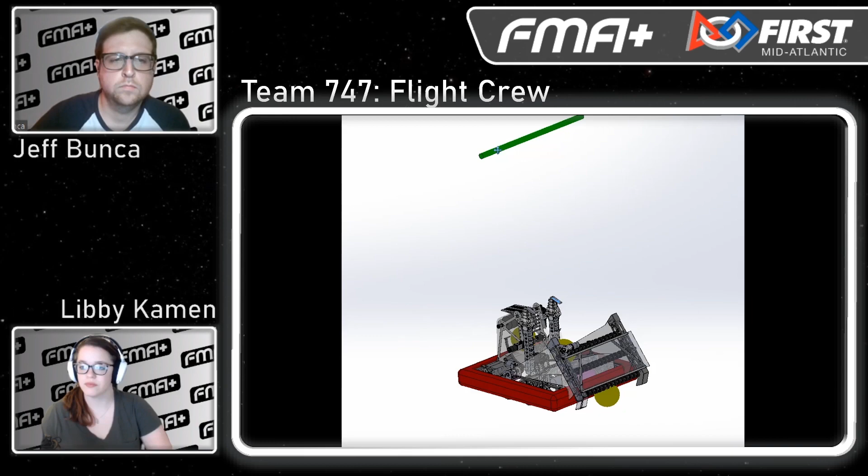And that's an awesome look at each component of the robot. Now, Sam, I know you guys have done a lot on sort of automation and sensor work as well, so why don't you give us a deep dive into that side of Charlotte?

Okay, so the majority of the time with programming on the robot was spent doing the autonomous tracking. And the autonomous tracking is split up into, I'd say, 3 major sections. I'm going to go through all of them, hopefully. What I'm going to start with is the system that we use to automatically adjust our aileron and RPM to face the target.

So we use a variety of sensors and devices to achieve this. We use 3 actually for the process. First, we use the limelight to get the angle to the center of the goal, and that's just used to turn. It gives us a good measurement of how far we are away from the target, just a range.

That's not how we do it at the end of the process, just because it's not that accurate, but we use it for a couple of our intermittent calculations. The other sensor that we use is called the LiDAR. It is a laser beam that fires a point out and comes back, and it gets our distance.

The final sensor we use is the encoder on our aileron, and that is just used to control the position with PID, and that is done in its own code. The actual auto tracking mechanism can hit a target anywhere within about 13 feet of the goal. This is only the auto tracking portion.

We can make our own presets to fire from the trench run or anywhere else, perhaps in the rendezvous point. It's just that the auto tracking system with the auto adjustment is within 13 feet of the goal. So the process itself to do the auto tracking, this is going to be a deep code-like system explanation, split up into about 10 steps.

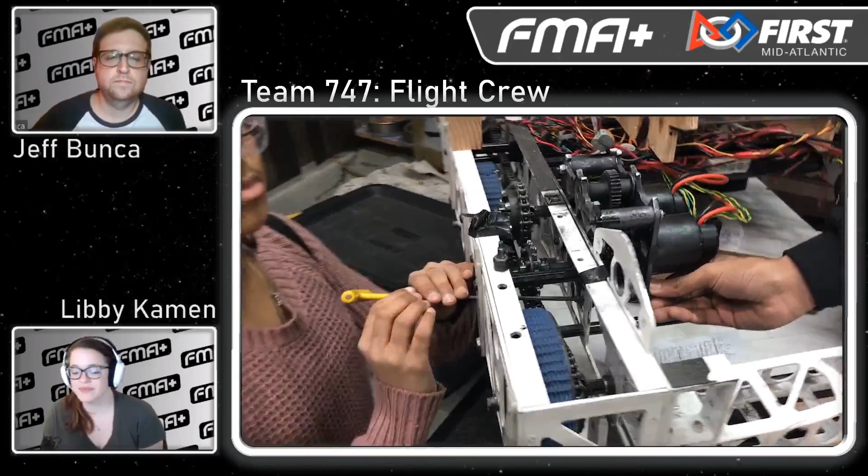Moving on to our recruiting process, since we're a community team and not a school team, we need to care about increasing the longevity of the team. One of the first things we do is have open houses, which is basically a mini presentation of each department on our team.

It's really great to see the perspective of a community team and how you build your roots, which is definitely different from the journey of other teams.

I love 747 Flight Crew. I love the imagery, the brand, and one of the things I hear a lot is 'fly the plane.' Sam, can you enlighten me on what that means?

Yeah, it just so happens that this term aligns very well with our name and our number, but I don't think the message behind it is required for a plane-themed team. Fly the plane is really based on the idea in aviation that when anything goes wrong, let's say your plane is falling out of the sky and you've lost all 4 engines, all you can do is continue to fly the plane. No matter what, you have to land the plane.

So in terms of the team, we have to apply this to what we do. Imagine we're in the pit and we lose 6 of our 8 wheels. All we can do is continue to work on the robot and hope for the best. So we use the term fly the plane just to basically say we have to continue working and get it done.

I love it. That's such a great perspective on how sometimes you really can't control what's going on at an FRC event, and you just got to fly the plane.

So Flight Crew, thank you guys so much for the insight, the deep dive into your robot, the automation, and your community outreach efforts. Where can I find more about 747 if I wanted to find you online?